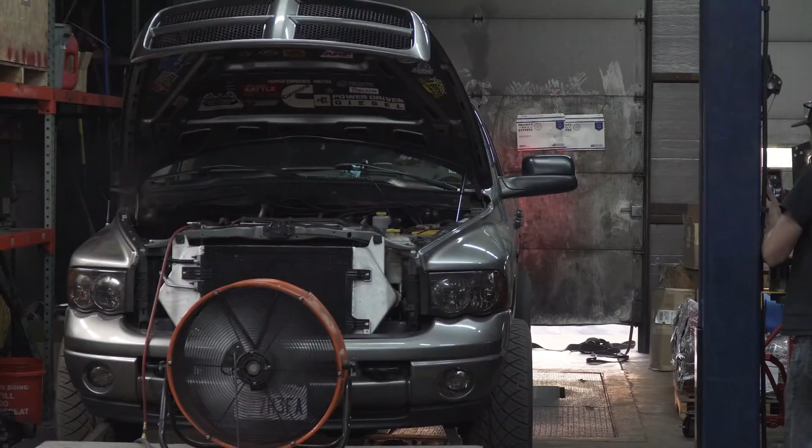The only changes we've made since our last dyno is we added that Exergy relief valve, which is a 2000 bar or 29,000 PSI rail, and we added our ATS dual fuelers, which I covered in the previous video. Again, a really nice kit.

I've been driving it around now for about 3-4 days. Much more responsive on low throttle input, and it also is a little bit cleaner going down the road at more of a higher throttle percentage. Anytime you get more rail pressure, obviously everything's going to burn a little bit cleaner.

Because we were dropping so much rail, I do think we have quite a bit left on the table with these dual fuelers, so we're going to get it strapped down. The only other thing we're going to do is James sent us a 6.7 rail pressure sensor tune-up. You can actually run a 6.7 from 07.5 to I believe 2012, but in 13 they changed the plug style. So we're going to put a 6.7 rail pressure sensor in here so we can utilize that extra 3,000 PSI. Again, we're going to dyno it just to see what the dual fuelers picked up.

Then we're going to go ahead and turn up the pressure to a 6.7 level, which these injectors and the pumps, everything's built for it. We got the right relief valve. We'll see how much 3,000 PSI rail pressure yields us as well. Should be kind of interesting. I've always been curious, pressure versus duration. So we'll get it strapped down, check it out, and see how much power we actually make with the extra rail pressure.

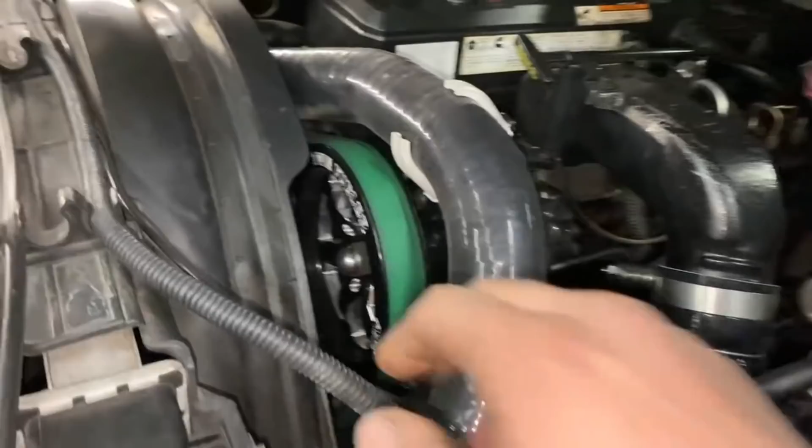Again, here's our dual fuelers. As you can see, no issues yet chucking the belt, and we have had some RPMs, especially in that burnout. We were up there. So without further ado, get her strapped down.

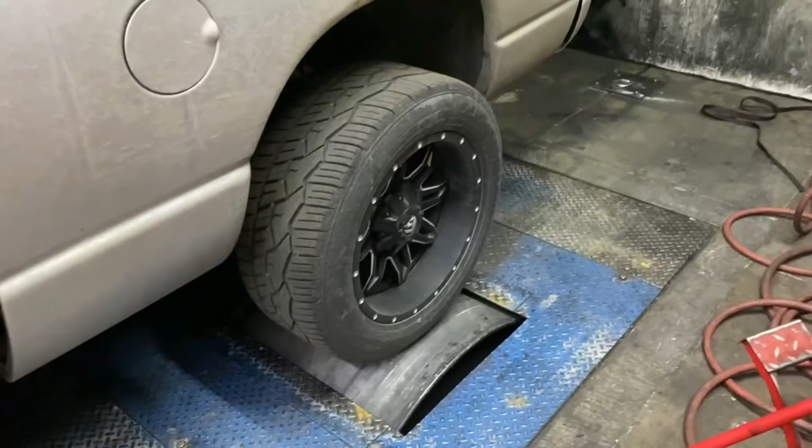Moment of truth time. So of course, like any good diesel owner, we're gonna go ahead and check the oil. On the stick, we're good.

A lot of you guys don't know, this is the Cole Perkins. He is also single, ready to mingle. Oh dear, and this guy is still single.

So just to fill you two in, we did 1,085 and the rail pressure was dropping to like 15,000 PSI. So based off my personal experience on adding more fuel and more CP3, I'm gonna say you're gonna lose 50 horsepower, because that's what happens when you put about $7,000 of parts into a truck.

I'll go with the opposite, gain 50 horsepower. So you think we're gonna do 1135? I really hope we do 1136. I hope not. So just to fill you all in, Meyer has the highest horsepower daily driver in the shop at 1136.

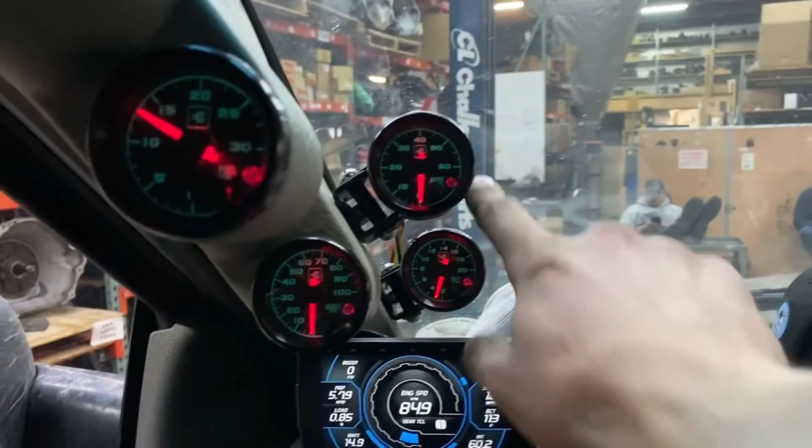The other thing we've added is an interstage gauge. This is gonna tell us what the 485 is doing. This is total boost, so that way you guys can kind of see what each turbo is contributing on this setup.

All right guys, it's go time. We're gonna try it in tune 4.

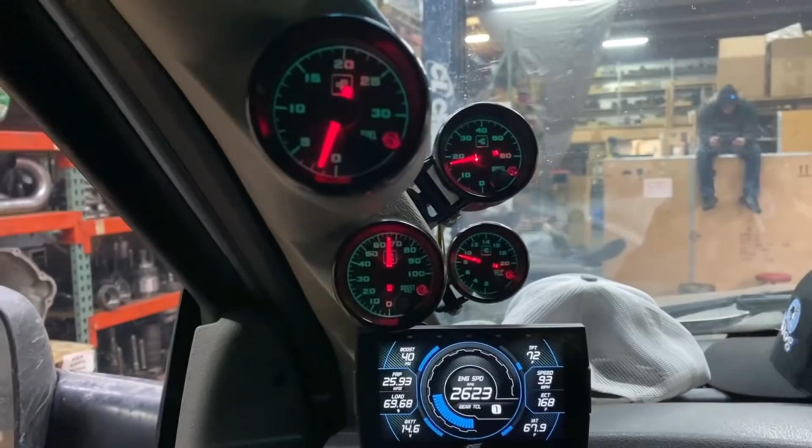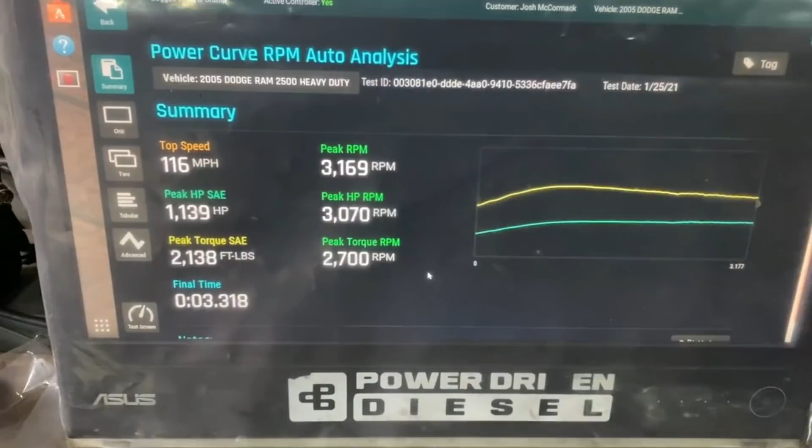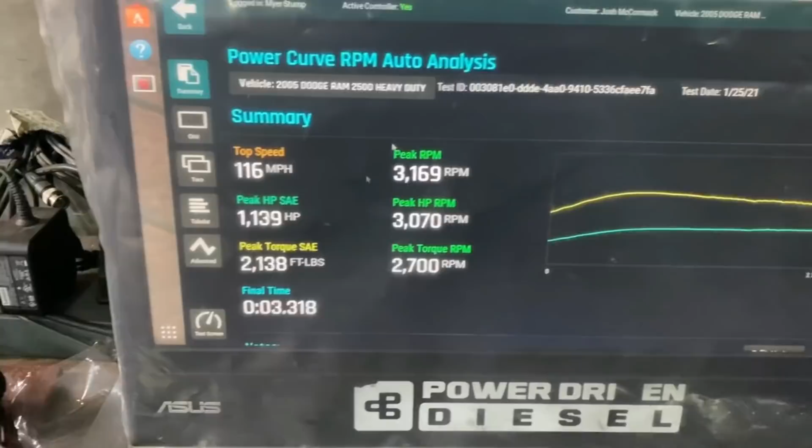Okay guys, first pull on tune 4. 1139. So we picked up 54 horsepower with the added rail pressure. It came up really smooth too.

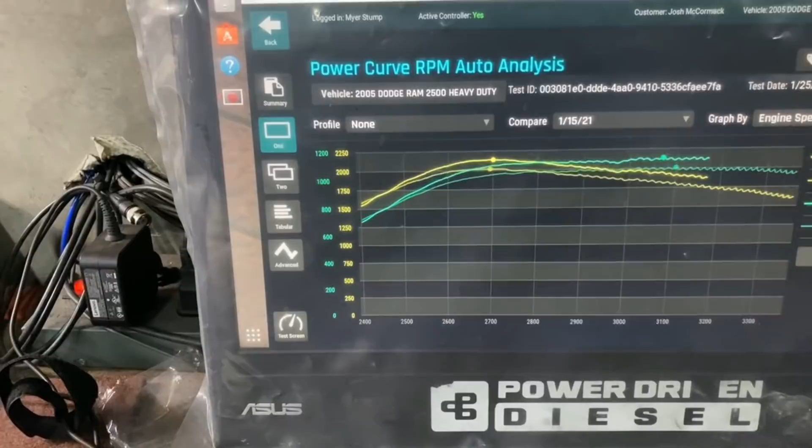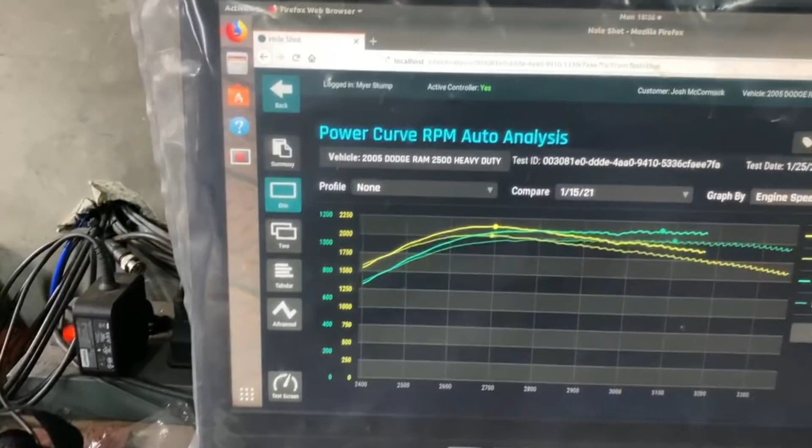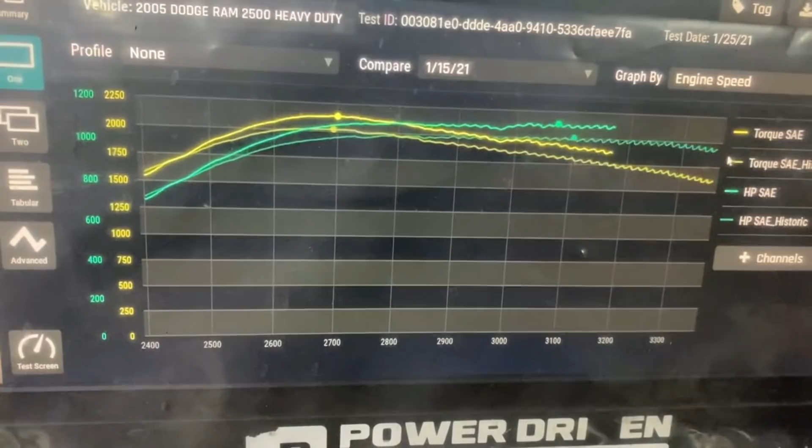Okay, so here's our old run. You guys can kind of see, oh, that's a little deceiving here, this is over engine speed. I mean, crazy, we picked up torque and we picked up horsepower. Didn't move the turbo spooling around, and you can't ask for a better roll-in than that. That was really nice. And what's really crazy, if you look here, see how the rail pressure kind of carried the power better too. It didn't really fall off until way over here. So that just goes to show you how much better that rail pressure is when you have it through a whole pull.

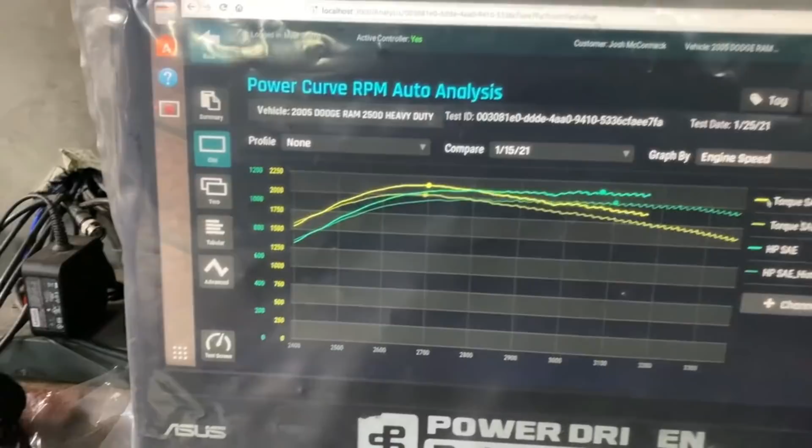I'll have to review the logs a little bit and see what rail pressure did, but I am super pumped. We now have a new highest horsepower fuel-only daily driven truck. Have officially taken the honor from Myer. He did 1136, I did 1139.

He legit does daily drive his and has daily driven it like that for almost a year. I got a long way to go, but it does feel good to make that power.

So just for the record, ladies and gentlemen, Myer has daily driven that 1136 horsepower Ripper. That's not even it, for a year. I don't even care. The thing is, they're crusty old turbos, and they've finally been outdone. I feel like I just have to add more crust to get back up on top. I'm just trying to figure out what kind of crust I should add. Probably tuna, no crust. No, honestly, I feel like I need to go to a smaller injector so it drives the turbos harder, because that's the second highest horsepower number to date was my original small injectors, just unplugging the FCA because I was out of rail on 2 stock pumps. But for those of you guys that don't know, Myer and I are good friends.

We're just really competitive. He's been mentally abusing me this whole time off camera. Now he's like, 'Oh, I was super cool, it's not a big deal.'

And I set out on this journey just to piss me off, just to beat Myer, and oh gosh. At least it only took you like 2 months - could've been less. What's it been, 2 months? It's been like 72 days. Damn it, I held out for over 2 months.

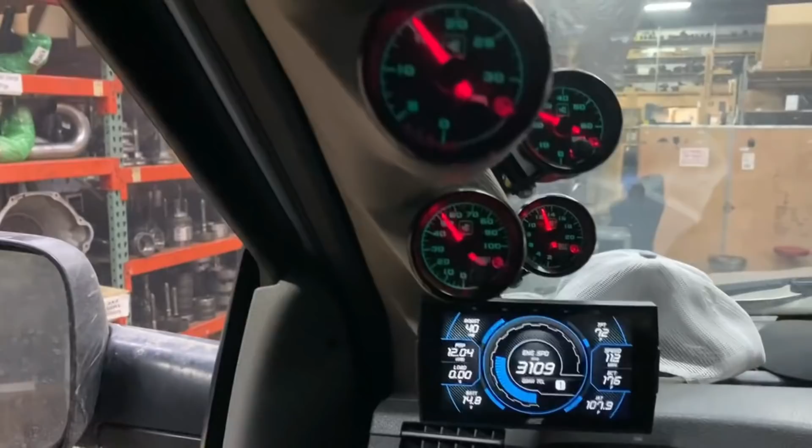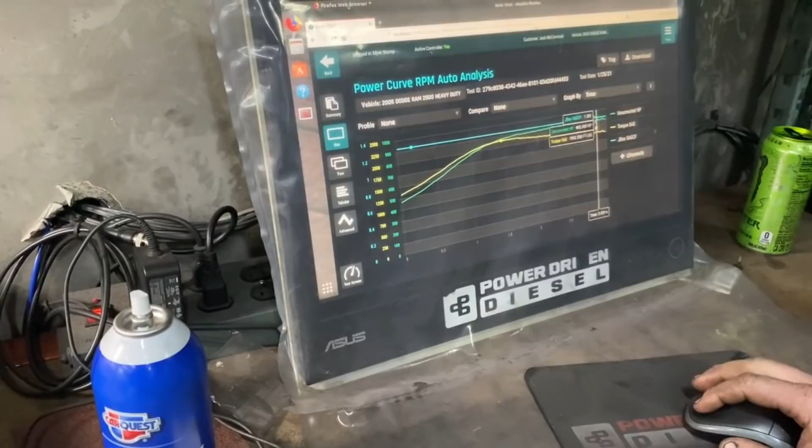1187. We set another record, and I let out too early again. I'm pretty sure I let out before it was done.

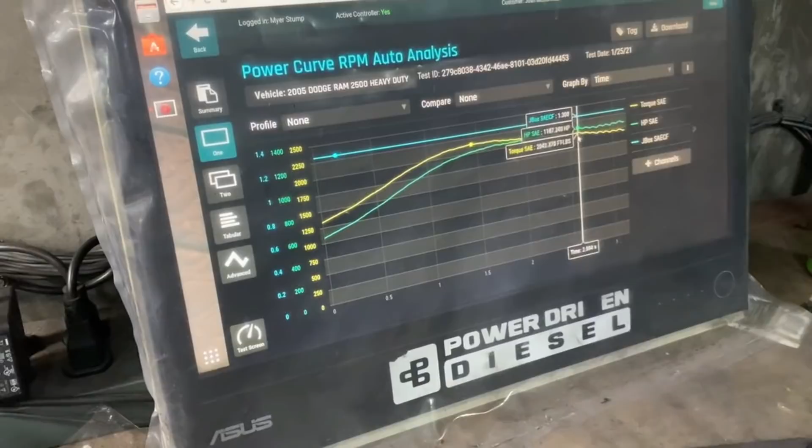Dang. Wow, actually it peaked over here. Yeah, so you were carrying the horsepower for sure, but dang.

So there was a little bit of controversy with Myer. We did the uncorrected numbers - he beat me by 17 horsepower uncorrected. I think there's no question now, yeah, he got me for sure.

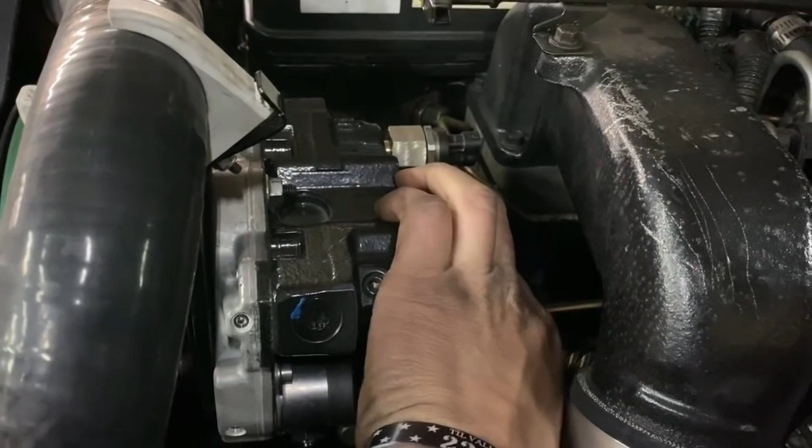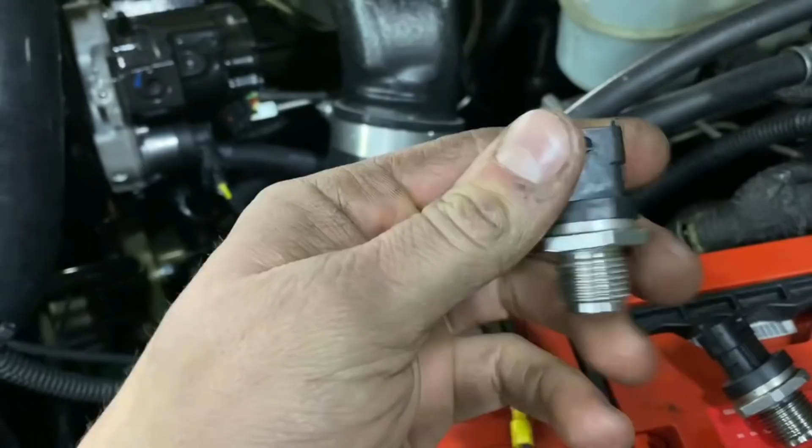As I covered on the ATS install, we have our rail pressure sensor here. I'm just gonna put a backing wrench here, spin this one out, and we have a 6.7 rail sensor right here, and here's a 5.9 one. I was just able to check off the date code, so we'll get it swapped over.

And we got it swapped. All we gotta do now is hook up our rail pressure extension harness, wherever it ended up. Oh man, of course I'm on camera and now I'm all thumbs here. So we're gonna go ahead and get this hooked up.

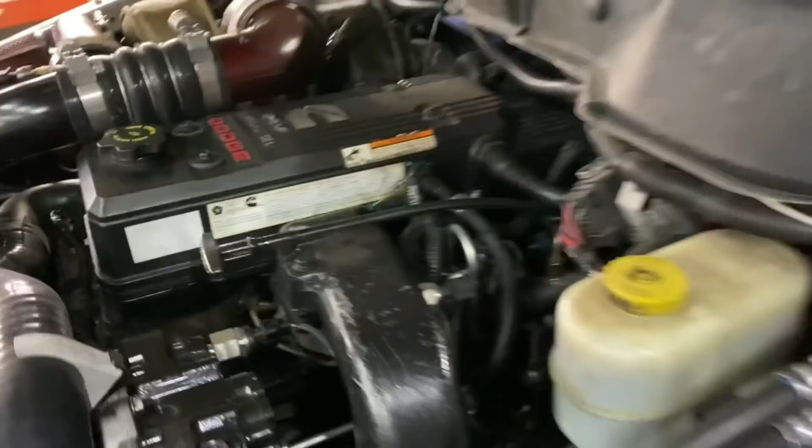Clicked in. We already got our auto cal tuned in the truck. Let's see what it does. This is going to be 195 or 190 MPa, which is 29,000 PSI rail pressure. And it will be the first tune, 2250, and then 2400 US.

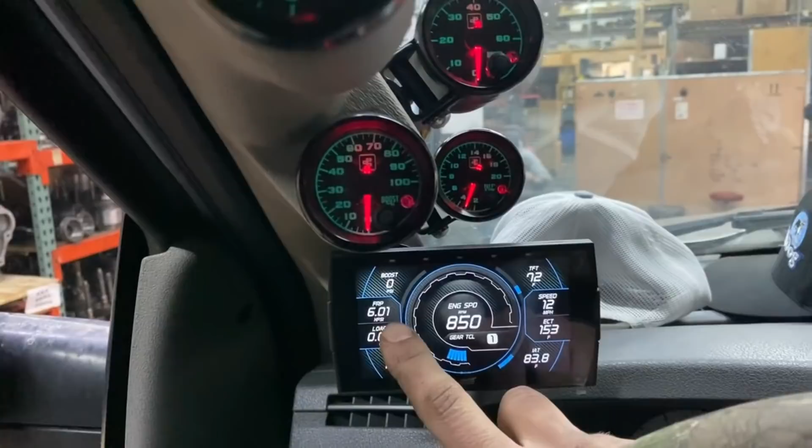Okay guys, we're gonna try tune 4. Again, that's 2250 US, 190 MPa. Just a reminder though, this is not going to say 29,000 PSI - a factory ECM cannot read that high, so let's go ahead.

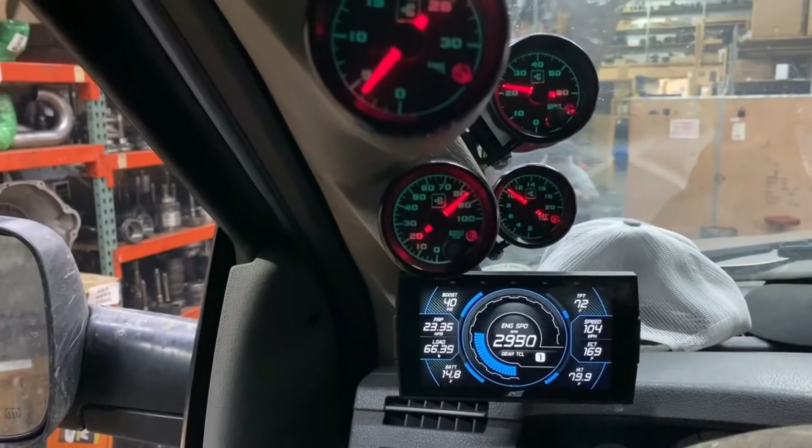Turbo power, baby. Yeah, but that's 150 less US. I was wrong - what was it, 2.4? Wrong, 2250. So we're down 150 US, and doing almost the same power, baby.

So guys, as you can see here, the last tune-up was, I believe, a 165 MPa, which would be a 5.9, 26,000 rail at 2400 US. All we did was increase rail pressure to 29,000 PSI with the 6.7 rail sensor, and we do have that Exergy relief valve. It went to, what's the number? 1166. So we lost 21 horsepower, but we did it on 150 less duration. So I think what we're gonna see is probably 1225 on tune 5.

To give this a fair test, we're gonna let the truck cool down a little bit and then hit it on tune 5 and see where we end up for the night. I'm excited. I think, I don't know, I mean it sounds good coming through.

I ran that one way higher on the RPM - I went to like 3,500 just to see how the power carries out. That way, when we go drag race this thing, I know kind of where we are in the shift. All in all, I'm pretty happy - I'm thrilled. Okay guys, while the truck is cooling off...

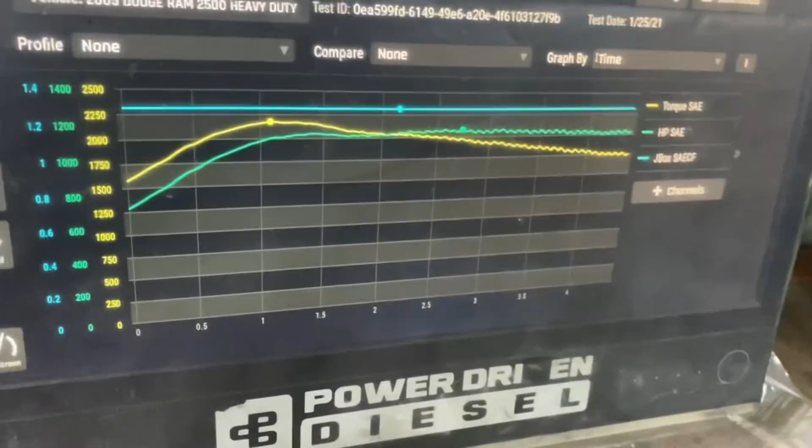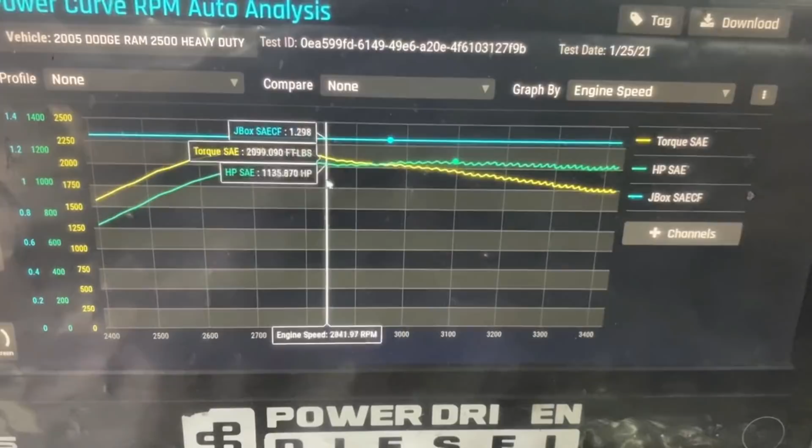Something interesting - like I said in the video, I ran this one out a little longer. You can see here, this is your torque, obviously the yellow line, green is horsepower. That setup is still over 1,100 horse past 3,400 RPM. That is awesome for drag racing and stuff because that gives you a lot of window to shift it.

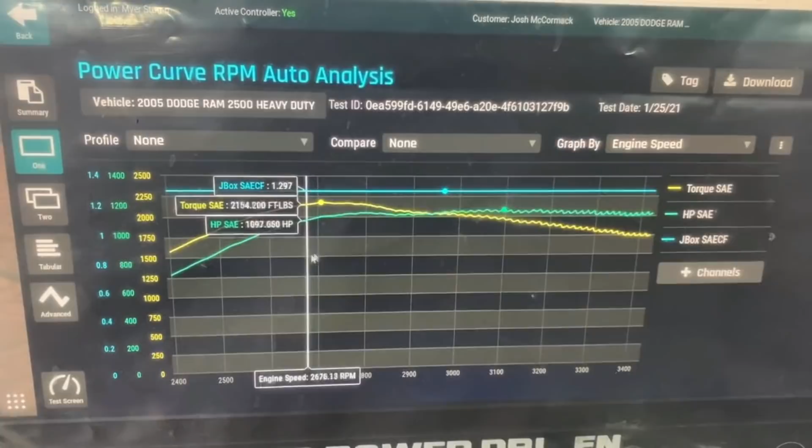Judging by the torque, I'm probably gonna want to shift to suck it back to 3,000 RPM. Reason being, if you suck it down too hard, that torque spike, especially if you go into overdrive, will be even higher on a shift spike. If you ever go to Northwest Dyno Circuit or any dyno event, they tell you you can shift it during the run, but if it spikes higher than anywhere else on the graph, it doesn't count.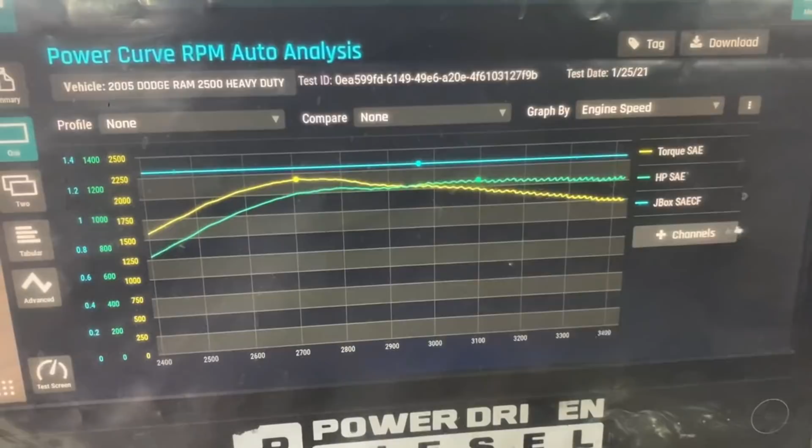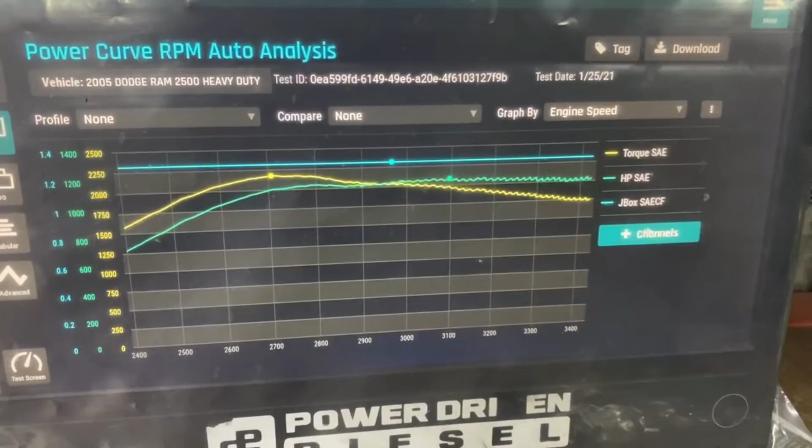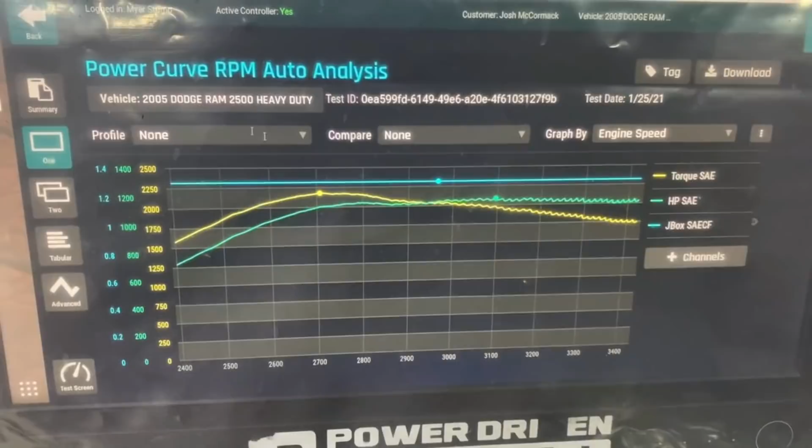Shift spikes do increase the perceived horsepower and torque quite a bit, but I'm really liking what I see here - nice and flat. That to me says the setup's doing well. This is non-gated, we saw about 94 pounds of boost, about 30 pounds interstage, so I'm happy with the numbers, happy with the power. All we have left is just to hit it at 2400 US at the higher rail pressure and see what she yields.

And guys, I just want to stress this enough - this is really cool to be doing this with 100 overs. The reason why we keep smacking it and keep pushing it and pushing it, I'm actually really curious with the piston to wall and the ring gaps that I chose on this engine to kind of see what evidence is left behind when we tear this down.

As you guys know, I build a lot of engines, whether for Power Driven, for myself, or for friends. I've created this chart of what piston to wall clearance I set, what ring gap I set, and what power it made. One of the coolest studies was Todd's Mega Cab, making about 990 horse and 2,000 foot-pounds of torque on a wide-bowl QSB 6.7 piston. I set the ring gaps really tight since Todd originally said 750-800, so I didn't want him to have a ton of blow-by. The piston to wall was also really tight on that engine. Unfortunately, he ended up blowing a head gasket. I looked in the bores and didn't see any scarring or scuffing, so I'm really curious what we'll see when we tear this engine down. I don't know everything, and I'm not embarrassed to say that. Everything I try to do, I test, hoping to build a better mousetrap, or in this case, an engine.

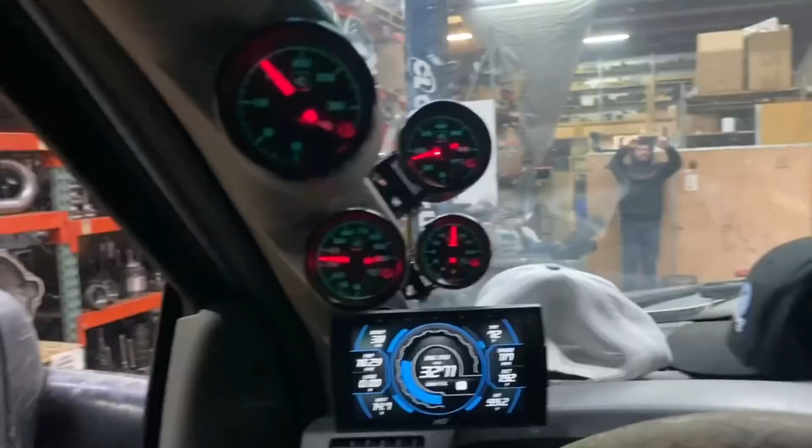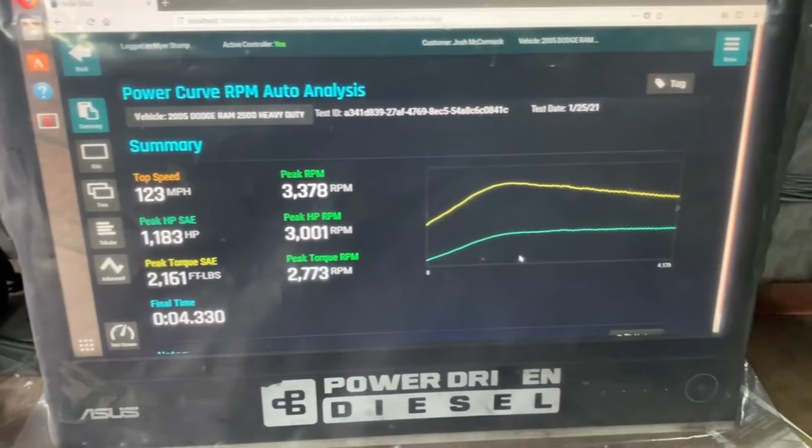So we are right back to where we started, 1183. I don't know, I'm not too sure what happened there.

So what we're gonna do is James sent a retune. We're gonna go ahead and flash in the retune and see if we pick up that 1200 horsepower. We are so close. Loading in the fresh tunes.

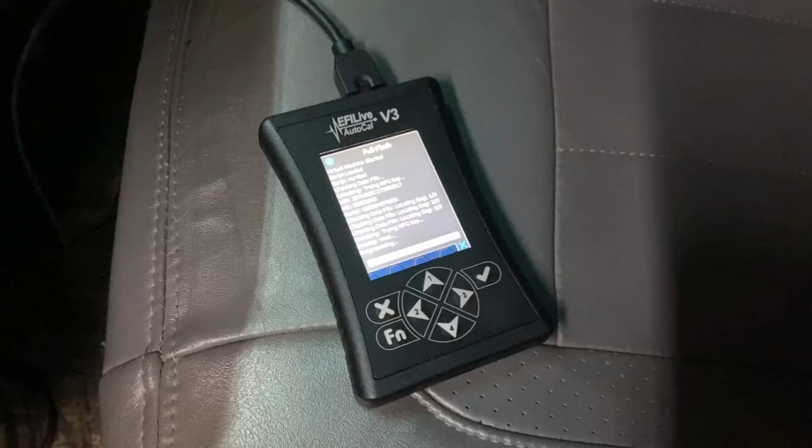Talked to James, we looked at all the data. The revision I was running actually had a lot more US on the pull. We did 1187 with 2600 US at 165 MPA. This tune at 2400 US and 190 MPA did 1183. So we're only 4 horsepower off with 200 US less.

So now we're gonna go ahead and do a true back-to-back. Tune 4 tested both ways was actually accurate, so we gained about 30 horse. I'm hoping this Tune 5 at 2600 US will get us over that 1200 horse number, so we could check another box off. I'm wondering if we're starting to get air limited, but we might play around with nitrous at a later time.

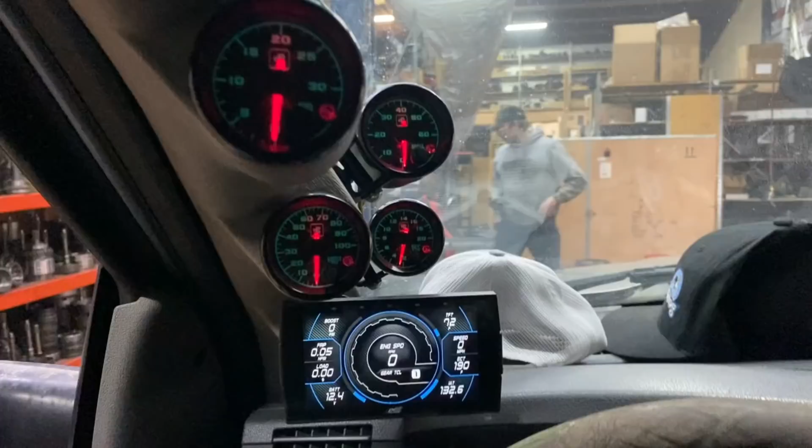Okay guys, here we go, Tune 5. See what she does.

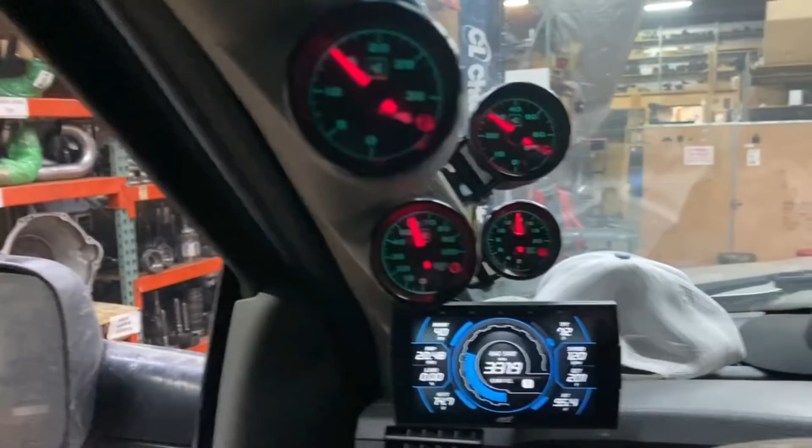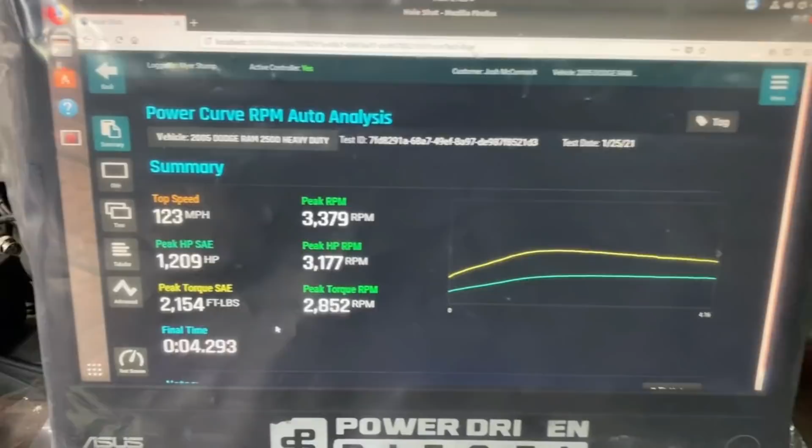1209. Woo! Did it. 1209 horsepower. Woo, spicy! What's crazy is we're letting out right at the same. It's nice, 1209, god dang.

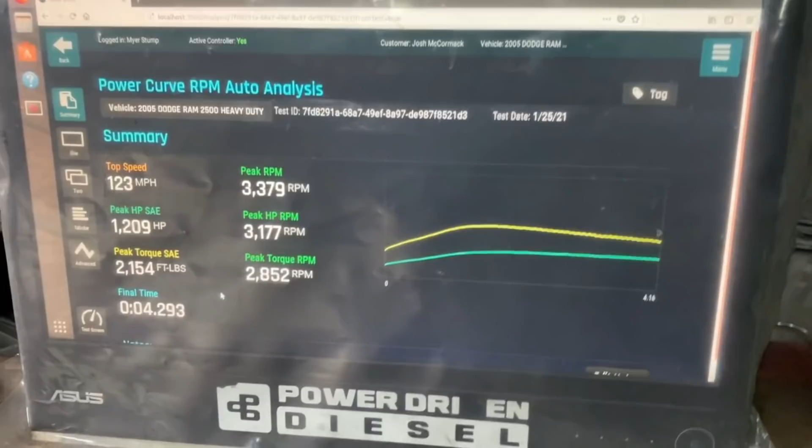The night is still young. I might have spoken too soon. James has some fresh sauce we're gonna try. We'll give it one more go tonight and see if we can get closer to maybe that 1250 number. Okay, here we go guys, Tune 5 with the pressure revisions.

Smoky though. Yeah, I think we're on a turbo. Dude, probably.

All right guys, so we just did 1213. So we picked up what, 4 horsepower? Yeah, 4. So 4 horsepower. It looked like it held rail better, but as Myer said, I can smell the smoke coming back in through the shop. I think we might be at the limit of the 485, certainly not the 467.7.

So we'll probably get it on the dyno again, maybe do some turbo swapping or some nitrous spraying. But dude, that's 100% overs, those are some big boys. Woo, that is sauce, full sauce.

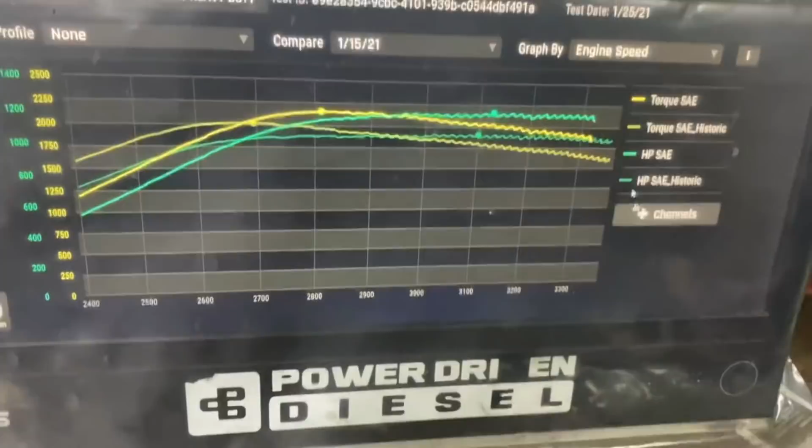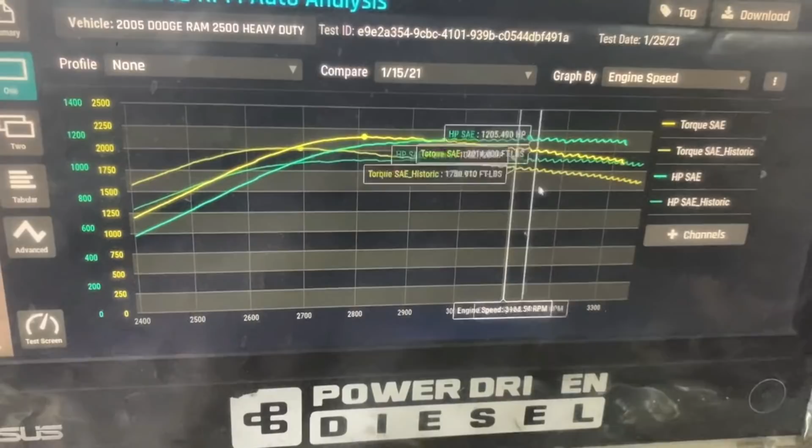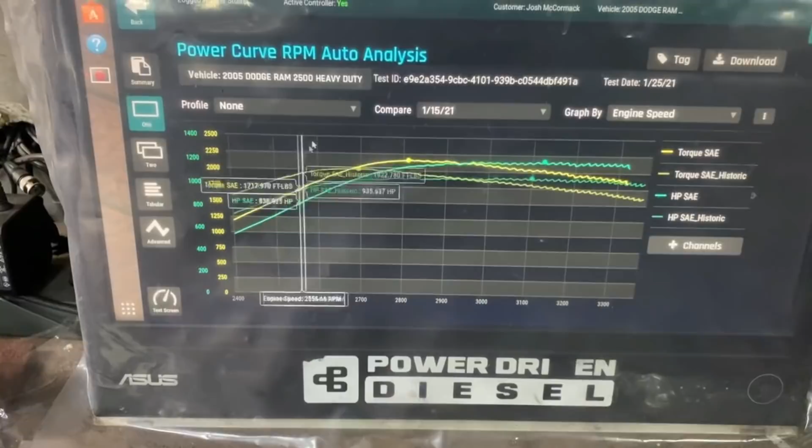Quick recap for you guys. This is our highest fuel-only pull that we did a couple weeks ago, probably less than a week ago. Here's the historic torque, here's the new torque, here's the historic horsepower, here's the new horsepower. So that pressure change with just a rail pressure sensor and a retune netted us around 125 horsepower. I think that's pretty cool. Power curves are very similar, dyno got ran very similar. So I'm really impressed with the pickup of just pressure.

We are gonna wrap up this video, another night of learning on the dyno. We now have a new personal best, 1213 horsepower for a set of 100 overs. Now we have the 2 pumps, a stock Duramax, and a 6.7 12 mil stroker from DDP. We saw that the AirDog is definitely struggling. I do believe right now we are air limited, so I think there's still a little bit more that we're gonna try and squeeze out of this. I may or may not have bought a couple of things to facilitate that, so stay tuned.

Again guys, this project's not over. We're gonna basically put a 6.7 in this thing and just keep beating on it until, I don't know, I guess I get really bored and want to sell it or something. What do you think, Myer? That's the only foreseeable option. You're never gonna just leave well enough alone. Yeah, that is true.